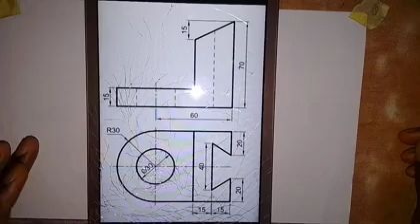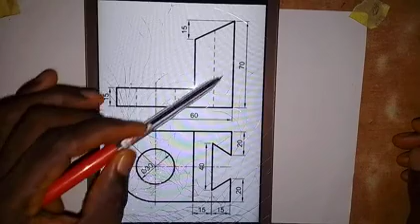These are orthographic views, as you can see on the screen, given in first angle projection, in which this is the front elevation, and this is the plan or top view. So we are going to put these two parts together to obtain the isometric view of this object.

So we are going to take this point as the lowest point, and then produce the part, giving us the isometric object from these given orthographic views.

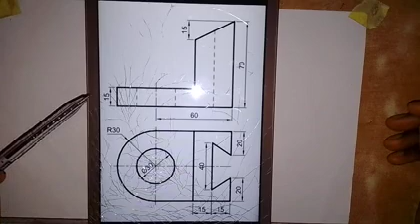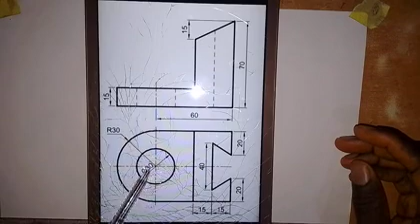Let's look at the dimensions we have here. In the front elevation, the distance from here to here is 70 millimeters, and to draw this line, you take a measurement of 15 millimeters down this 70 millimeters to get this point. The thickness from here to here is 15 millimeters, and the distance from here to the center of this circle is 60 millimeters. The radius of this semicircle is 30, and the diameter of this circle is 30 millimeters.

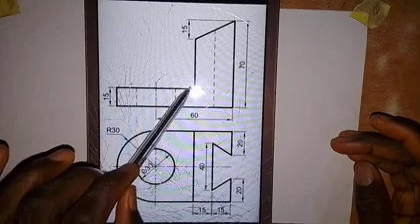The distance from here to here is 40 millimeters, from here to here is 20, and from here to here is 20, from here to here is 15, and to this point is also 15 millimeters. So we are going to make use of these dimensions to obtain the isometric view of this object.

The first thing I'm going to do is produce this shape as you see here, and you are going to get it done with ease.

Let's start. The first thing we have to do here is draw a short horizontal line. I'll just put it somewhere around here. Then, with my 30-degree set square, I'll draw a line in this direction, like this.

Then I'm going to draw a short vertical line at this point, and another short vertical line at this point, looking at the object as I have it here.

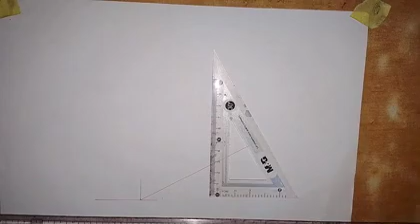So I'm going to do an addition of this 30, the radius of the semicircle, plus this 60, that gives us 90. So I'll take a measurement of 90 millimeters on this line from this point. So here we have 90 millimeters.

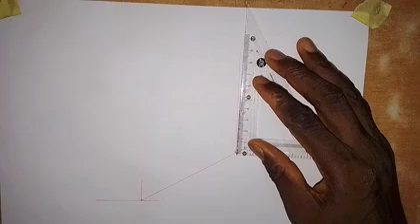At this point I'm going to erect a vertical line, like this. Then on this line I will take a measurement of 70 millimeters off from this point. So this is 70 millimeters here.

Now the next thing I'm going to do is draw a line in this direction, like this.

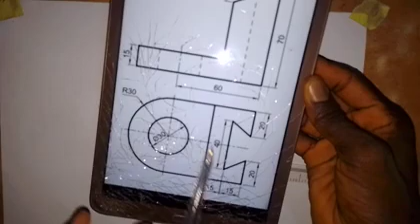Having done this, the next thing I'm going to do is take a measurement. I want to bring the object so we can see it. The total distance from here to here is 30, as we have 15, 15.

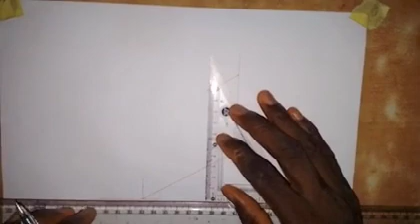From this line to this end is 30 millimeters, so I'm going to take a measurement of 30 millimeters from this point. So this is 30 millimeters. At this point I'm going to draw a vertical line down here. So this is the vertical line.

Then I will also take a measurement of 15 millimeters from this point, so 15 millimeters from this point up, this is 15. So here I will draw this line, in this direction, to meet this vertical line.

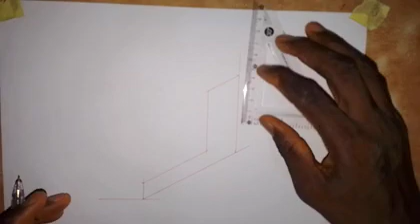But I'm going to take a measurement of 15 millimeters down as I've shown it in the drawing. So we take 15 millimeters down, and then we join this point together, like this.

Based on what we have there, as I said, it is this shape that I want to produce first, which I've done now.

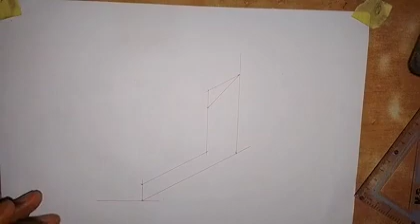So you can see it as we have it here. Now let's go and work on the other part.

The first thing I'm going to do now is with my 30-degree set square, I'm going to draw a line from this point in this direction. So it goes to this side.

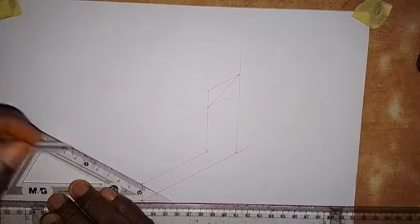At this point also, I will draw a line in this direction. Then coming to this point here, I will also draw a line in this direction, like this. Then here also, at this point, I will draw a line in this direction. Then coming to this point here, I will draw a line in this direction. Alright, so we have this.

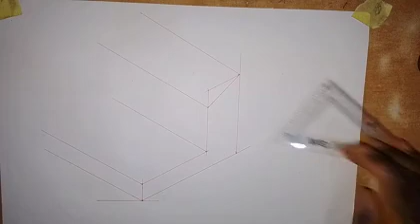So let's take the width, from here to this side. Let's see what we have for the width. The width from here to here is going to be 60 millimeters, because from here to here is 30, and from here to here is 30, so that gives us 60 millimeters.

So we take a measurement of 60 millimeters from this point to the left side. So this is 60. All you have to do now is draw a vertical line at this point, and then we transfer this point to this end here. Then we also take a vertical line up to touch this line, so we draw a vertical line here.

Now if you look at this, the line is slanting. So what I will do is come to this end here and take a measurement of 60 millimeters to this side. So this is 60 millimeters. I'll just join these together, because this line is a non-isometric line, so we have to join like this. So we have this now.

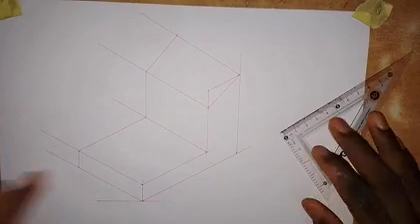So the next thing we are going to do is work on this surface. Based on what we are given, let us produce this shape. From here to here is 15, so let us get that 15 millimeters. What we have to do is take a measurement of 15 millimeters from this end. So we have 15 millimeters from this end.

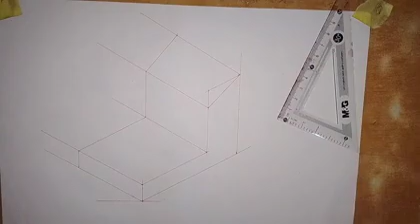Okay, yeah, so what we have here is correct, because we took a measurement of 30, which is the normal. By the time we draw this line, it will be longer than this one, because this is a non-isometric line. So we are right.

So what we have to do is come onto this surface here and take a measurement. It's on this surface that we have to take 15, so we take 15 here, not on this line. So that is what we have. Let's take note of that.

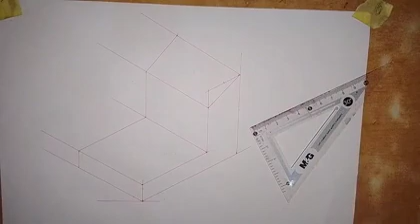What I will do now is draw a line, a vertical line, to touch this sub point. Then at this point, I will now transfer this point to the other side, like this. So we have this now.

Coming to this end, I will take a measurement of 20 millimeters from this end to this side. That is 20. Then I will also take 20 from here to this side, this is also 20. Okay, so that's what we have here.

So looking at what we have here, there's something we need to take note of: the distance from here to here is 40 millimeters, so we have to work that out. On this line, we take the midpoint, so the midpoint is 30. Then we take 20 to this side, so this is 20. Then we also take 20 from this midpoint to this side, so this is 20. So here we have 20.

So all that we are going to do now is join this point together with this point and make it a thick line. We join like this, and then I'll also join this point together with this point, making it a thick line. So that's what we have there.

At this point now, I will draw a vertical line, making it a thick line. We are going to see a line going down like this, down to the base. Then this line also we make a thick line, like this.

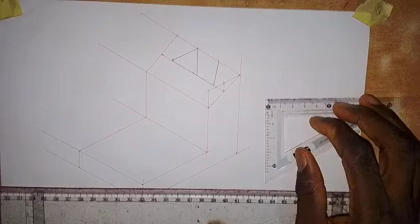I will stop this one here for now because I want to draw the semicircle that we have here. So I'm going to draw a curve here, and also an isometric circle at the center. Let's go and see how that can be done.

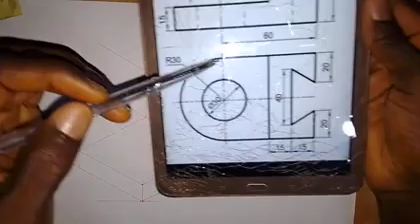First of all, start with this curve here, with radius 30. What we are going to do is produce an isometric square on this surface of length 60 millimeters. If I take this measurement, this is already 60 millimeters, so this is already a square.

So what I'm going to do is get the midpoint. This is the midpoint, 30 on this side. Then I'll also get the midpoint here, which is also 30 from here. So this is 30 millimeters.

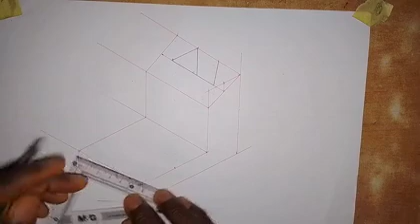So I'm going to transfer this distance. I will transfer this point here to the other side as a center line. Then also I will transfer this one to the other side as a center line like this.

So I'm going to join these points together, these opposite corners, like this. Then because I'm just producing a semicircle here, I'm going to join these 2 points together like this.

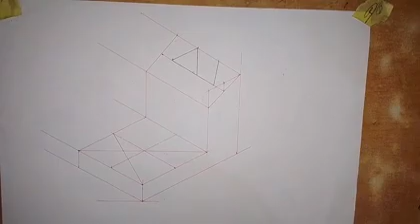So we are going to make use of this center, and then this center. We take our compass and put the midpoint here at this point, where these lines intersect. Then I will extend the pencil point to this point here, or to this point, either of the two.

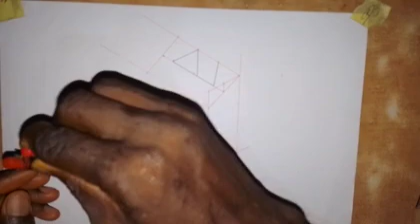So I can go on and draw an arc here now. Just take it easy, and draw the arc here like this. Okay, so this is what we have.

Then I will put the midpoint here at this point, and extend the pencil point to the point that we have here. Then I'm going to draw like this. So we have it here now. Here we have this curve here.

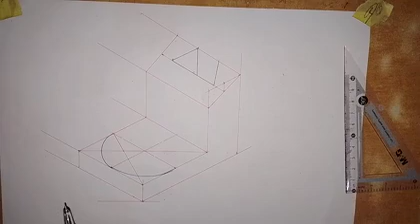So the next thing we are going to do, we also have the curve down here, but I'm going to produce that curve down here. So what I will do is take my set square and draw a vertical line down. I will take a point somewhere around here, and draw a vertical line down.

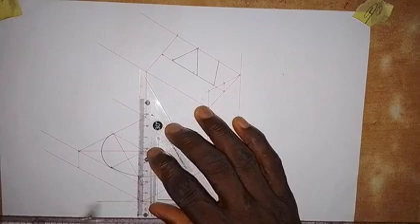Then coming to this point here, I will also draw a vertical line. I'll come to this point, and draw a vertical line. Then coming to this point here, I will draw a vertical line. So I'm going to make use of this.

So the thickness is 15. From here to here, from this point to this point, is already 15. While this one, I'm going to take a measurement of 15 millimeters down from here. This is 15 millimeters here, and then from this point also I will take 15 millimeters down. This is 15. Then this already 15. So this is 15 millimeters.

So it's only this one that I will come here. I need to come down a bit. Then I will take 15 millimeters just down here.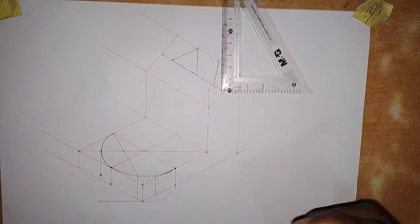So all this I'm going to join together with the use of the French curve. I will join them together with the French curve. So here is it. We are going to join from here.

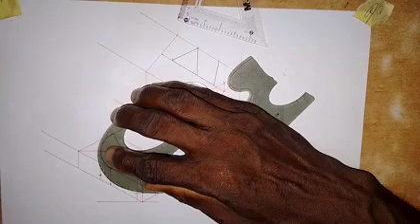So you join these 2 points together, and then these 2 points, we join them together like this. Then these 2 points here, or these 3 points, I can join them together like this to form that curve. So this is it.

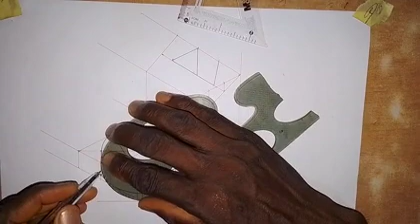So this is how the curve will be. This one we still need to make sure we bend it a bit. So just use your French curve to do that.

Now, this point, I will make them thick, and maybe I will draw a thick line through this. So this is what we have here on this surface. So what we are left with is the isometric circle.

What we are left with is to produce this isometric circle here on this surface. They both have the same center. The diameter of the circle is 30, so the radius is 15.

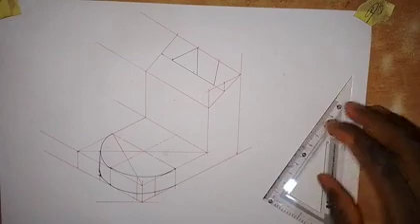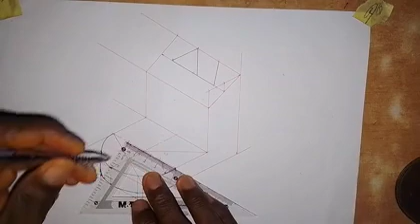So we are going to be taking a measurement of 15 millimeters from this center here. We take 15 millimeters to the left side, and 15 millimeters to the right side, making 30. Then on this line, we take 15 millimeters down here, and then we take 15 millimeters here.

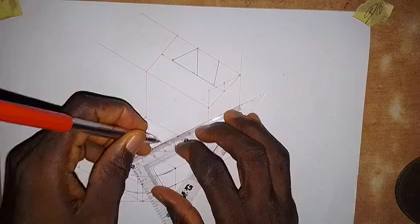So we are going to create an isometric square on this face here. It goes like this. So we are going to draw a line.

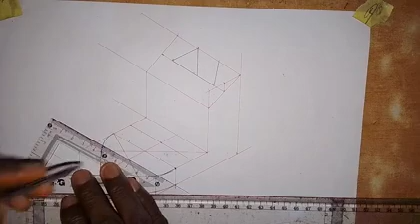Here in this direction, and we also draw a line here in this direction. Then here also we draw a line, and then coming to this point, we also draw a line. So we have an isometric square here.

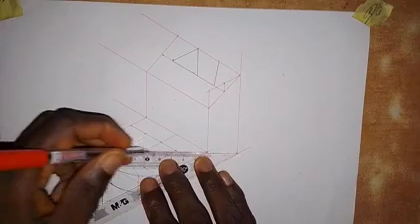Looking at what we have here, so for the longest corners as we have here, we still have this line. Then we are going to join this point. This point and this point, we join them together.

So we join these 2 points together like this. And then we also join this point together with this, like this.

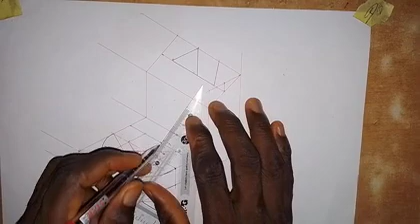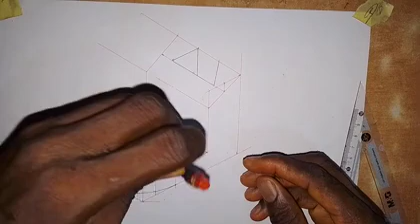So then with the compass, putting the point of the compass here at this point, we extend to this point here, and then we are going to draw an arc. So we go on, and here we draw an arc like this.

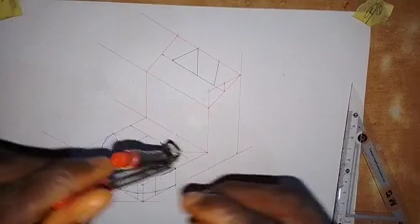So we have that. Then we put at this point, so from here, we draw an arc. Then we put at this point, so we extend it to this point here.

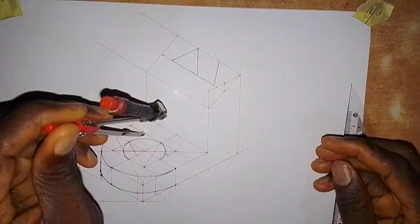And here we draw an arc like this, and then at this point here we draw an arc like this. Okay, and let's set it well.

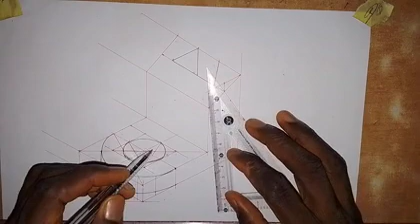So we have this, we have the circle here. So let's check if you can see a little part of the down part of this circle around here.

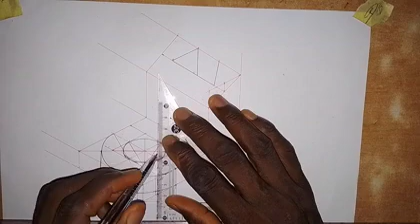I'll just draw a vertical line here, and then coming to this point, I'll draw a vertical line, and then take a point here, draw a vertical line.

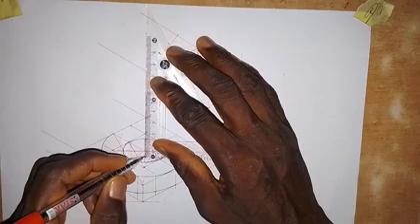So take a measurement of 15. This is already 15 millimeters, I think this is already 15 millimeters. So on this line, I will take 15 millimeters. So from this point, 15 millimeters.

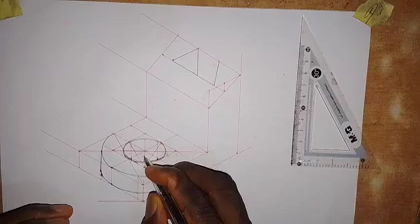So I'm going to join these 3 points together. This point, and this point, I will join them together with the use of the French curve, because I can see a little part of the down part of the hole.

So here, I will also join this together. So this is how it will be.

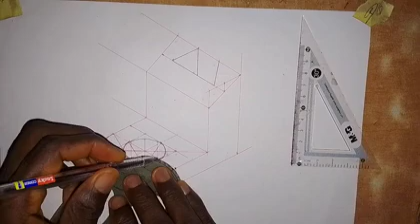So this is what we have here. All that we need to do now is to make this line a thick line. So I'm going to pause the video and do that. Then when I'm done, I will come back and you see what I've obtained.

So this is the isometric view of this object, as simple as I've done it here. All you have to do is to practice. The practice will make you become a master at this.